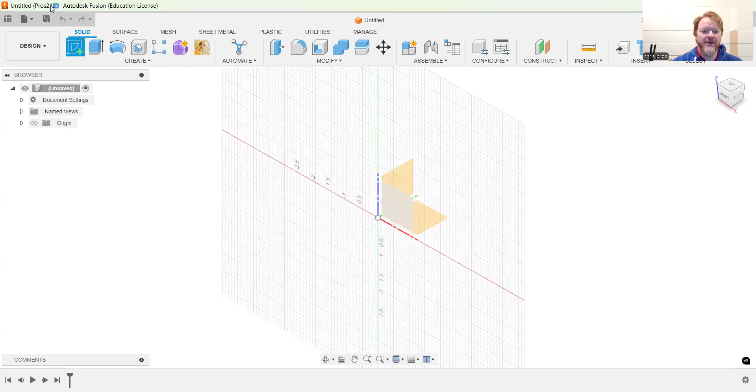So I'll just create a sketch. I'm just going to create some basic shapes, but these will work with any shapes. Just know the process.

I apologize, my computer is trying to run too many things at once, so it goes a little slower than it normally would.

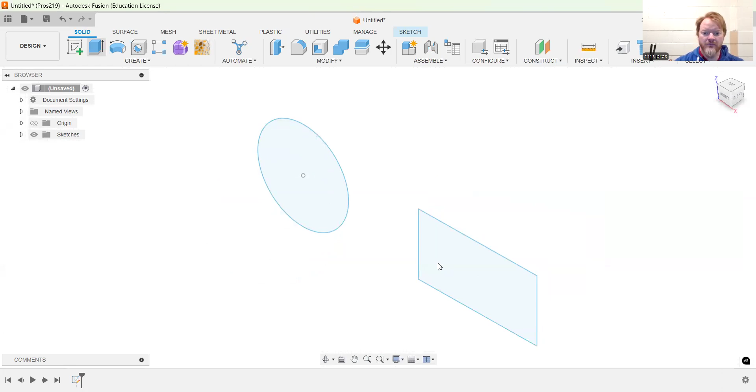So here I have two shapes. First thing I have to do is create these two bodies - see them over here, body one, body two. I have to turn them into separate components. So I'll right click on that first body and create components from body. I'll do the same thing for body two - right click, create components from bodies. Now I've turned those bodies into separate components.

I'll click on this first one, right click, and you'll see something called create drawing. So first component, create drawing.

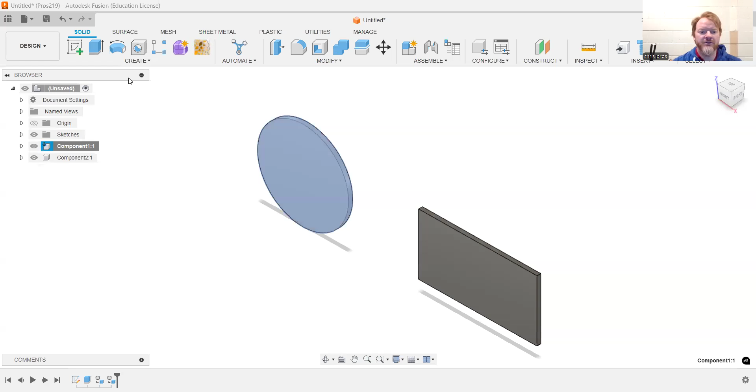Now over here, we're not going to mess with anything. I'm going to keep this at B because our laser is 20 by 12 and this is 17 by 11, so close enough. You'll have a little extra wiggle room, but we don't want to get too close to the edge with the laser either. So this will be fine for what we're working with.

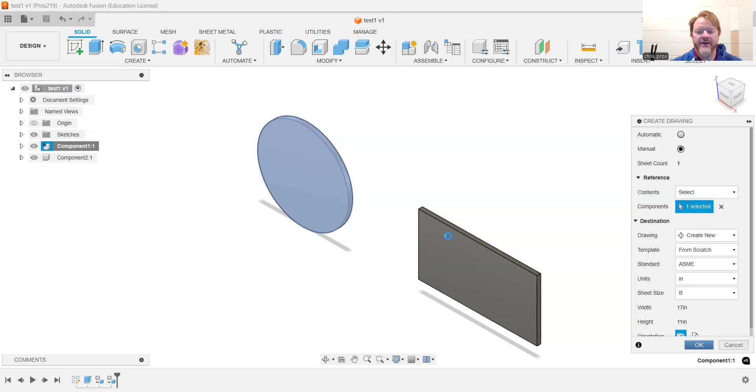I will click OK. Same way we normally create drawings, it's going to create the same thing of just that component that we've created. Again, this will take just an extra second because I've got a lot of things running on the computer.

Okay, come on, why are we going so slow? All right, apologize for that delay.

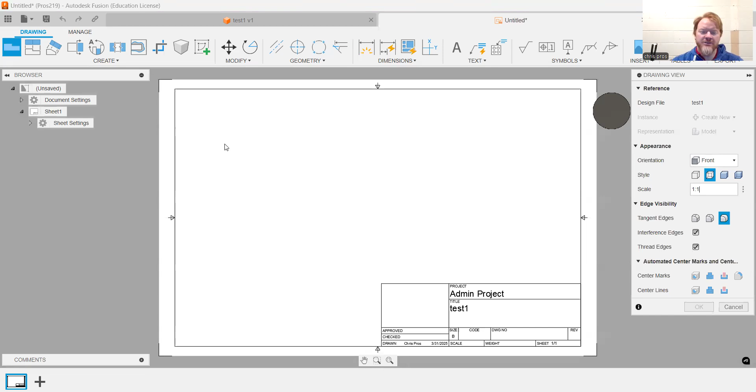So here's my normal drawing. Now, when the sides pop up, we have to make sure that our scale is 1:1. So make sure you change your scale to 1:1. Just place yours anywhere. Click OK, and now that's here.

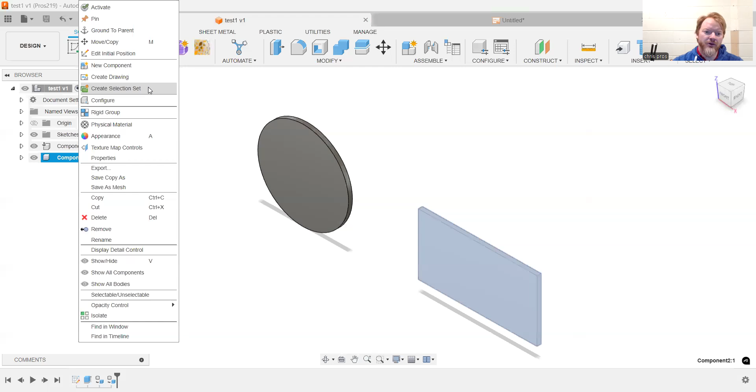I'm going to go back to my part, and here's where it's going to get a little different. I'll right click on component 2, same way we've done before. I will go to create drawing, the same thing we were at before, but I'm going to change a few settings here.

First, I don't want to create a new drawing. I want to add it to that drawing I just made, which I never saved, so it's still labeled as untitled. I also don't want to create a new sheet - I want to add it to sheet 1. So those are two super important settings you got to change. Set it to the drawing that we just did and the sheet we just did, and I will click OK.

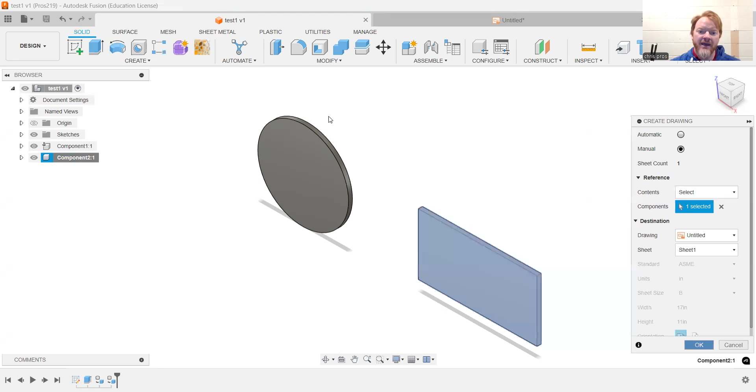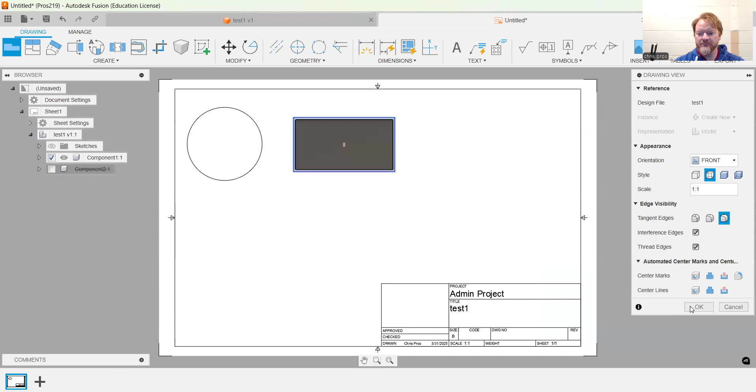Now again, I have to create this at the right scale. If this is facing the wrong way, you could also change your orientation here. So if you did something on a different plane and need to rotate it, you can rotate it as needed. In this case, I did both of them on that same plane, so they'll be fine either way. I'll place that one, press OK, and now I have both.

Now, before I export this to start lasering, the laser is going to see these and it's going to cut these out or engrave or score, whatever we want to do. However, it's also going to see all this stuff and try to laser that too.

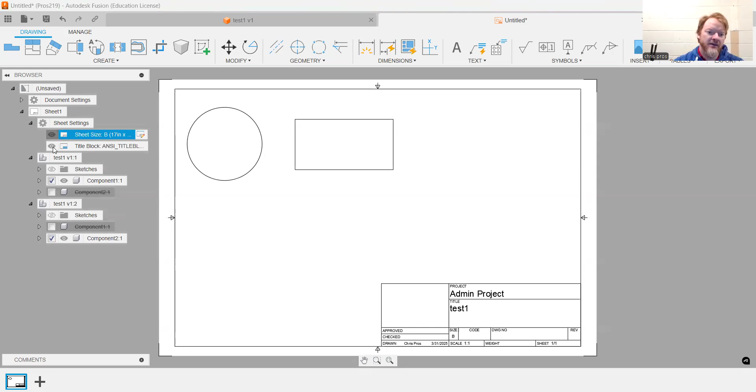Over here at sheet settings, if I click this arrow, I can hide the title block and that page sheet size. So I will remove both of those, and now I'm just left with the sheets, or with the parts.

I can go to export, click OK. Now I have to remember where I'm saving this. I'll just put this in - this is going to my screenshots. I'll just stick this in my downloads folder to make it a little easier, and I'll label this test one. You could save it again for whatever you're making. So now it's going to my downloads and I'll click save.

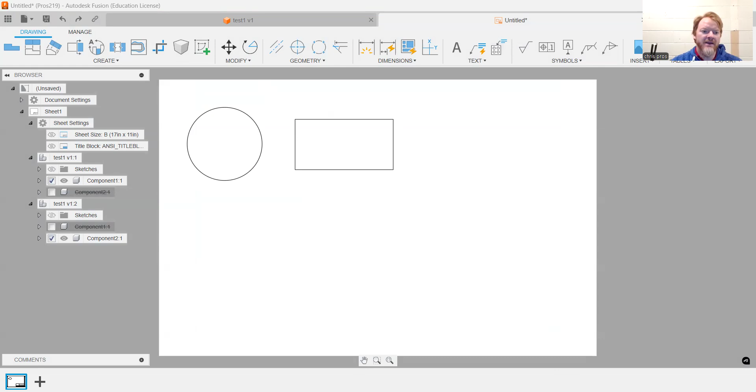So basically save this as a PDF. I can now go to Glowforge. I can create a design and upload a file. Go to my downloads - test one is there. I'll open it.

Sorry, I just realized I'm not sharing the right screen anymore. Let's try that again.

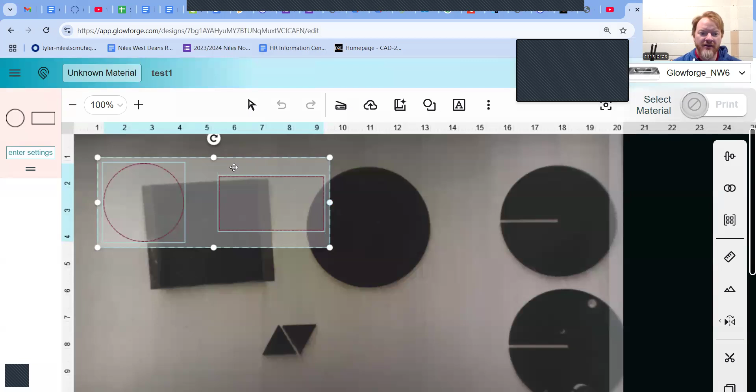So now that I'm in Glowforge, let me show that one again before we get too far ahead of ourselves. I'll go to create new design, upload a file, I'll find test one, which you might not be able to see at this point. And it brings that part that I just made into Glowforge.

Now you'll have to change your material to whatever we're lasering on, and you'll see it's set to cut. Now, if you wanted to move these around individually, you can.

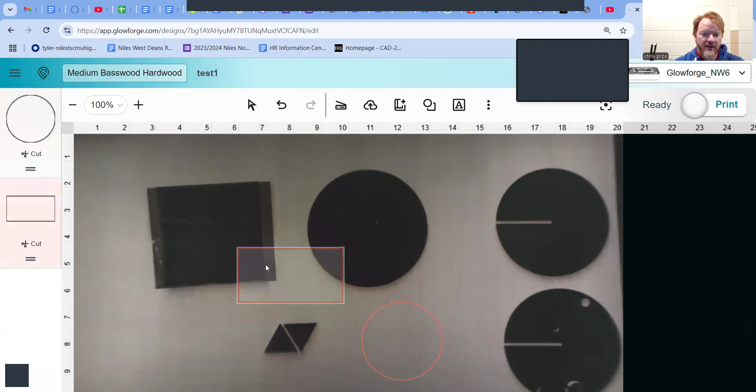Now, if you wanted to, say, engrave one and cut the other, I can copy and paste as a new step, and now I can remove that first one - oops, that one. And now I have two separate ones that I could set individually, or if everything's getting cut, you could just leave it the way we had it before.

Now, when I send this through, it'll laser cut what I just created in Fusion.